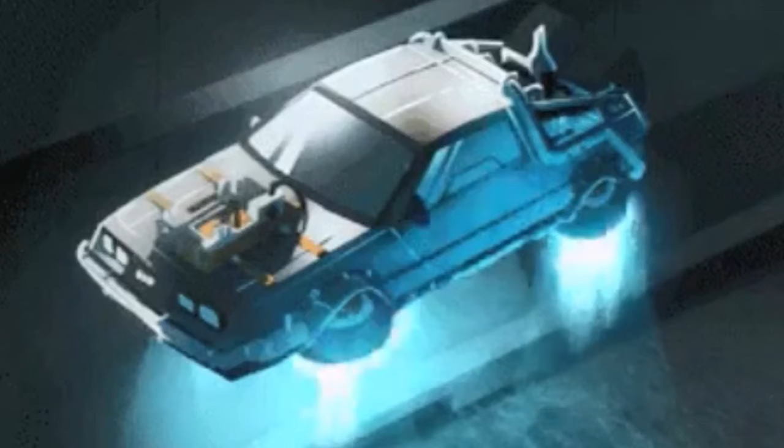Since 2018, Elon Musk has been hinting that the newest Tesla Roadster will use rocket thrusters to launch the car at previously unheard of speeds for production vehicles. Then, in February 2021, Elon appeared again on Joe Rogan's podcast and gave more details on the planned rocket car hybrid, saying it may even be able to hover 1 or 2 meters above the ground.

Now, is this just Elon Musk being the eccentric billionaire we have come to know and love, or is a flying rocket-powered roadster actually possible? There seems to be a lot of differing views around this, so let's do some rocket science and find out if this is physically possible.

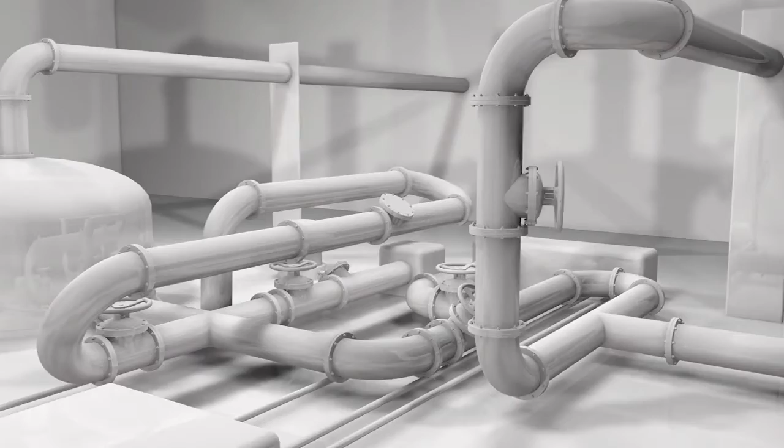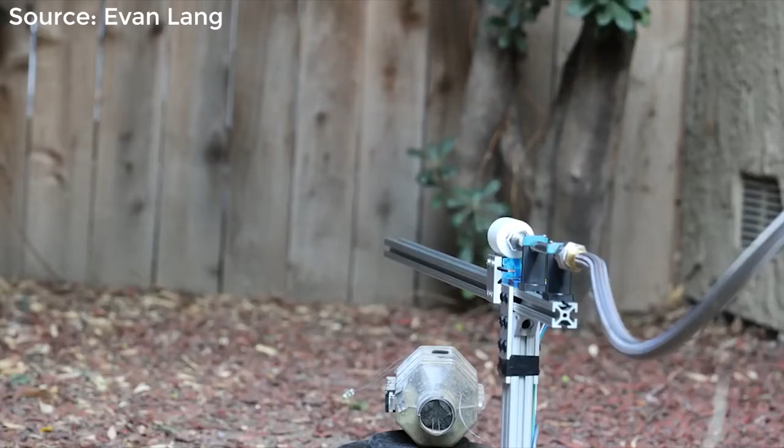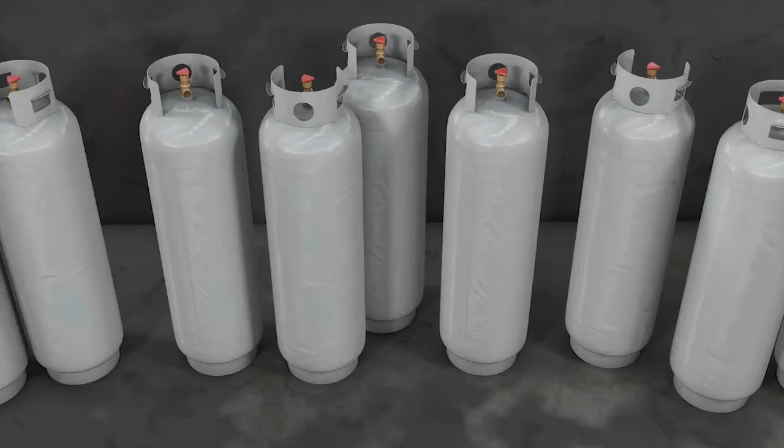Before looking at these, it is good to see what a cold gas thruster actually is, as that is the type of rocket Elon Musk says the Roadster will use. A cold gas thruster is a type of rocket engine that uses the expansion of a pressurized gas to generate thrust. This gas could be many things, such as nitrogen, helium, or even normal air, which is a mixture of lots of them. Elon Musk has said that the Roadster will use air from onboard compressors.

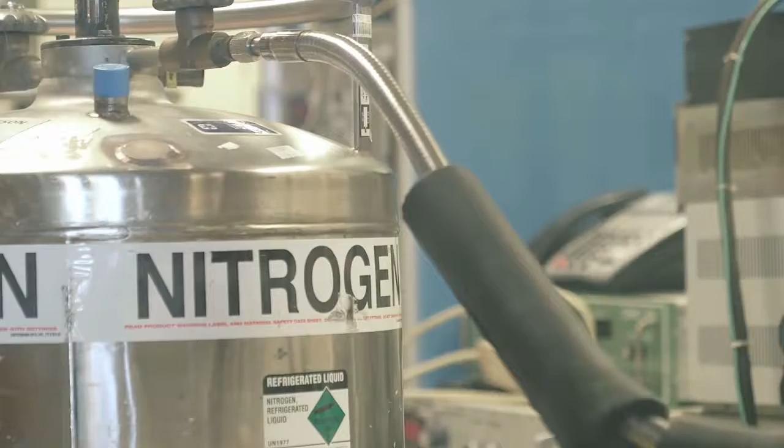However, as we will see later, this is probably not the most practical option, so we will instead assume that we are using compressed nitrogen gas. The compressed gas is in a pressurized tank, and as it is released through a valve, it expands and produces thrust. This makes cold gas thrusters much simpler, cleaner, but also less powerful than other rocket types.

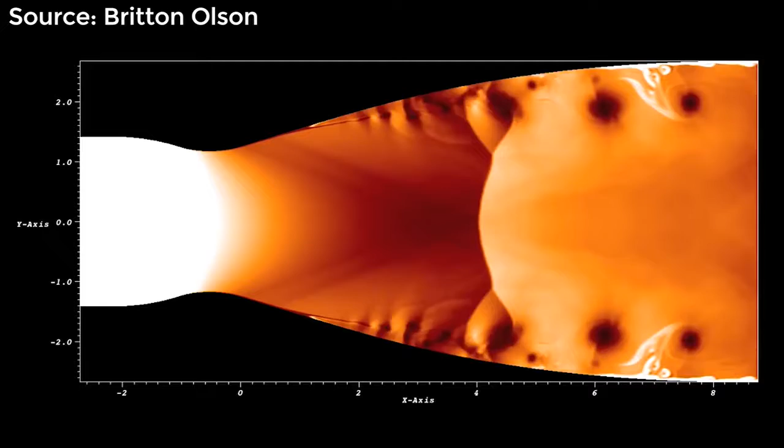Because looking at the nozzle design is beyond the scope of this video, we'll assume we have an ideal nozzle which perfectly expands the gas. This means that the pressure of the gas here, at the exit of the nozzle, is the same as the pressure around it in the atmosphere. This makes the whole system much easier to understand without sacrificing too much accuracy.

So from what Elon has said, we know the rocket should produce 3 tons of thrust on Earth, which is equal to 30,000 newtons of force, which incidentally would be enough thrust to lift the whole car off the ground, as it is expected to weigh around 2 tons.

And to allow the Roadster to hop off the ground or accelerate to over 100 miles an hour, we'll probably need this for, let's say, 5 seconds. With this, we can start to size the rocket thrusters and see if this is actually possible.

You may have seen videos about rockets with people talking about specific impulse, which is a good measure for seeing how much thrust certain types of rocket propellant can give you per kilogram. So a high specific impulse means you get a lot of thrust per kilogram of fuel.

However, in this video we are going to look at how fast the gas comes out of the rocket, known as its exit velocity. Because we are assuming we have a perfect nozzle, these values are easily related. Personally, I also find exit velocity much more intuitive and easier to understand than specific impulse. To find out how much thrust our rockets can give, we'll use a variation of the classic force equals mass times acceleration, or Newton's second law.

Instead, we'll say the thrust force is equal to how much gas is being shot out of the rocket, known as the mass flow rate, times how fast it is going. So we know the force needed, which is 30,000 newtons, but how do we know how much gas is coming out and how fast it is going?

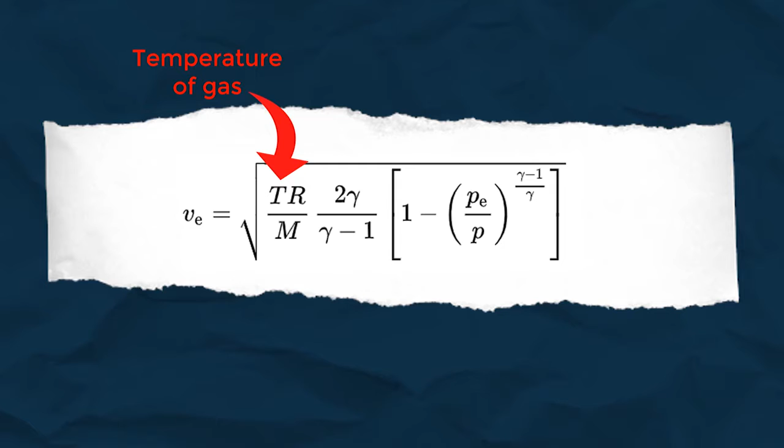To answer this, we'll first work out the speed of the gas. This uses a pretty horrible looking equation, but it's not important to understand fully, so don't worry if you don't, and stick with me. The key thing to know is that with this equation, you can work out the speed of the gas coming out of the rocket if we know its temperature, pressure, and some information about our chosen gas, which is nitrogen.

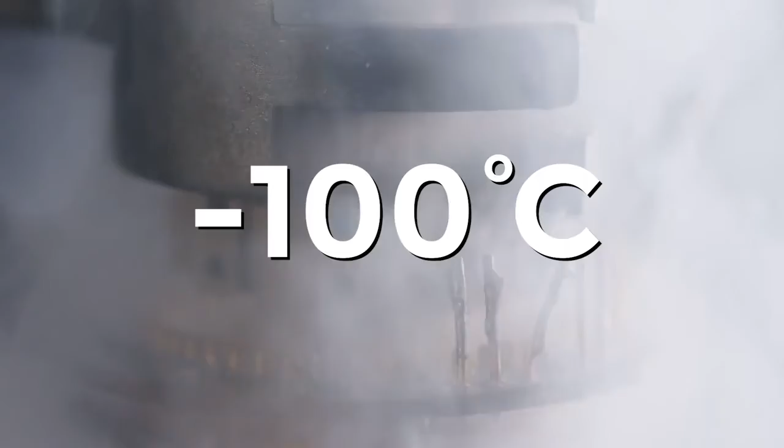Because the gas absorbs a lot of heat from the pressurized tank as it expands out, the cold gas thruster can get very cold. So for this video, we'll use minus 100 degrees Celsius, or minus 148 degrees Fahrenheit.

And for the tank pressure, we'll vary it to see how this affects the speed of the gas. This graph shows the results, and it is clear that if we keep the tank pressure above a few hundred psi, we should be able to keep the gas going around 500 meters per second, or 1100 miles per hour, at all times. It will be quicker to start with before the thruster gets cold, but this gives a good overall estimate.

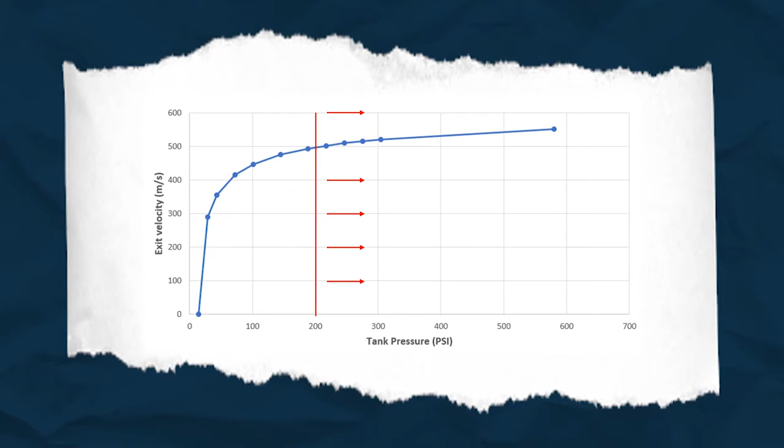So now back to our original formula. We know we need 30,000 newtons of thrust from a jet of gas going 500 meters per second. From this, we can work out that we need 60 kilograms per second of nitrogen gas. So for 5 seconds of thrust, we'll need a total of 300 kilograms of nitrogen.

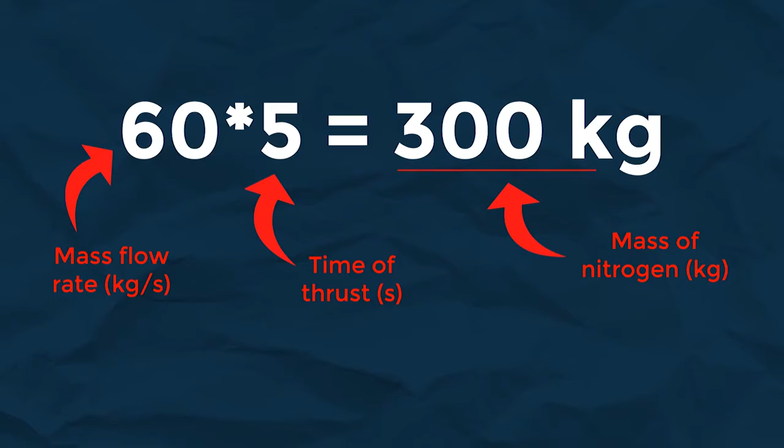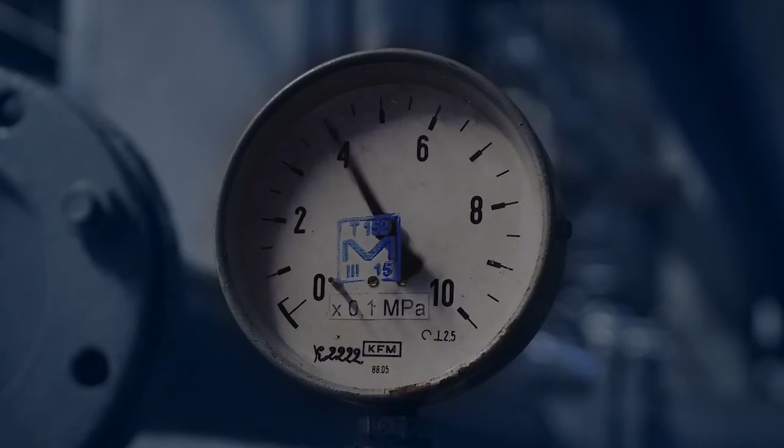Well, that sounds like a lot of gas. And it is. So is this even possible? The way this would be stored is in composite overwrapped pressure vessels. These can hold very high pressure gas, up to around 700 bar or 10,000 psi, which is the value Elon Musk said the gas will be stored at. For reference, this is also the pressure that hydrogen is kept at in the Toyota Mirai.

With this information, we can see how many gas tanks we will need. But before we do that, there's one more thing we need to look at. The gas released from the pressure tanks is controlled by valves, and these need to be able to allow enough gas to go through them at all possible operating pressures.

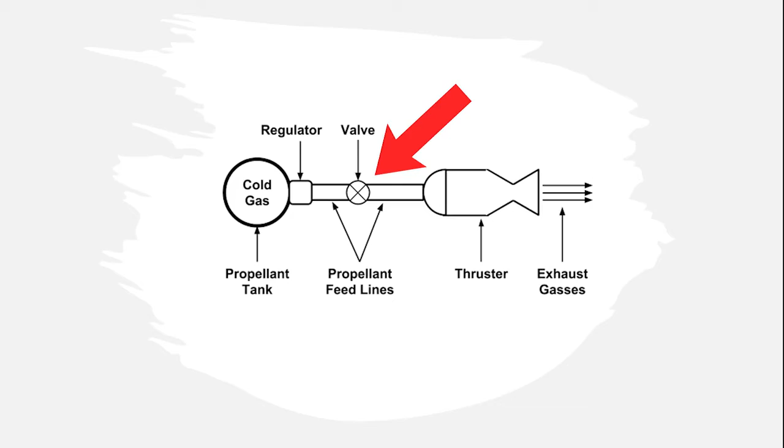To keep the same amount of gas flowing the whole time, the valves need to open wider as the pressure drops. Think of this like lots of people trying to fit through a door. If the door was bigger, people behind wouldn't have to push so hard or apply as much pressure to get the same amount of people through the door.

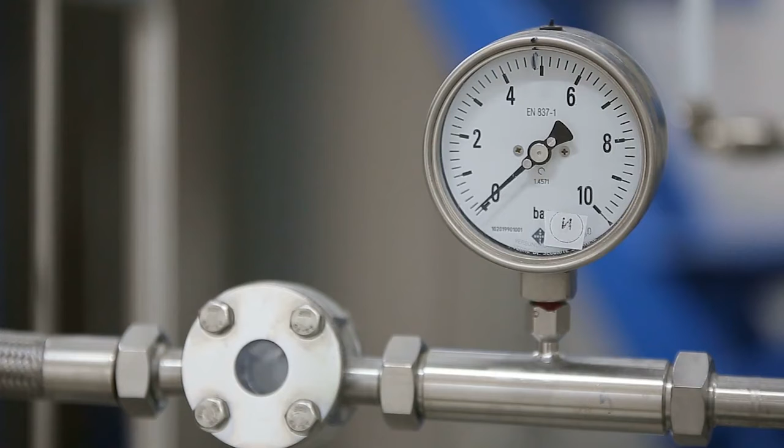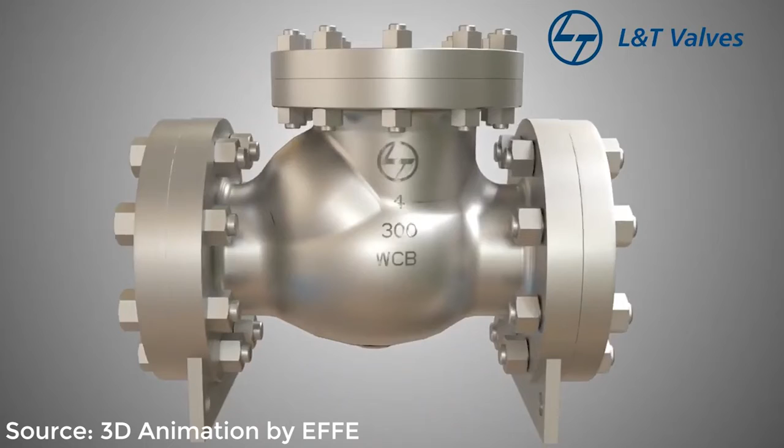So why is this important? Well, as the pressure in the gas cylinders gets very low, the valve would have to open extremely wide to let the needed amount of nitrogen through. For valves, a value called the valve coefficient, or CV, is used to say how much gas or liquid will pass through them under a certain situation. As the pressure of the nitrogen tank decreases, these valves will have to operate at a higher CV value to make sure enough gas can go through it.

To show this, I've used an equation that works out the valve coefficient depending on the required gas flow rate, its density compared to air, and the tank pressure. Though it should be noted, for the flow rate of the gas, I have divided it by 4, as we will assume 4 small tanks are going to be used. Like with exit velocity, I have plotted this for different tank pressures.

We can see that the valve coefficient gets pretty big when the pressure in the tank goes below a couple thousand psi, unlike the exhaust velocity that only started reducing after a few hundred psi.

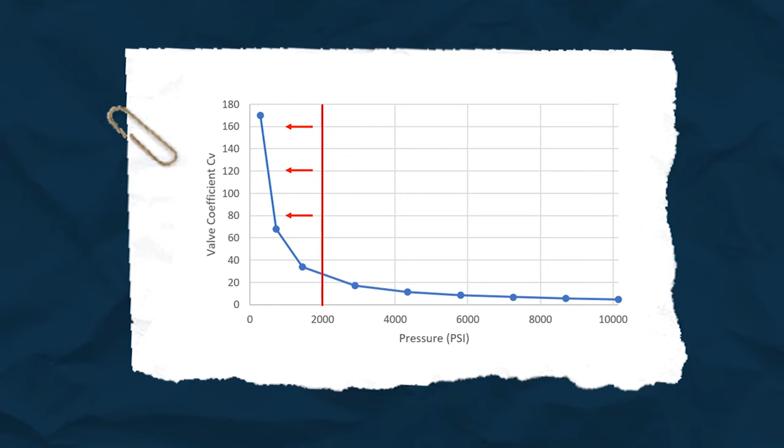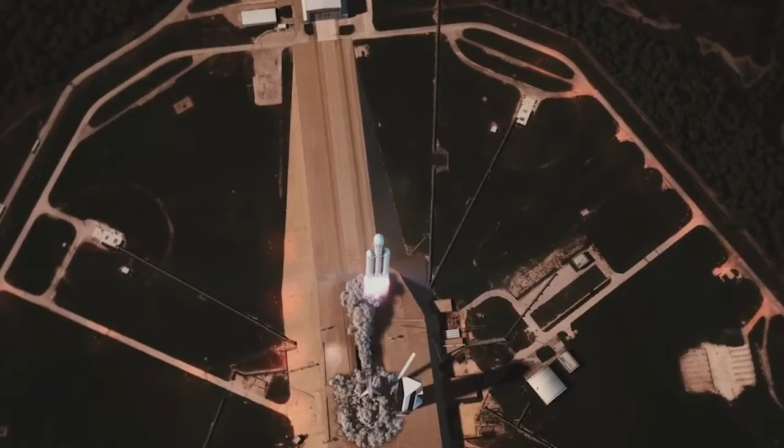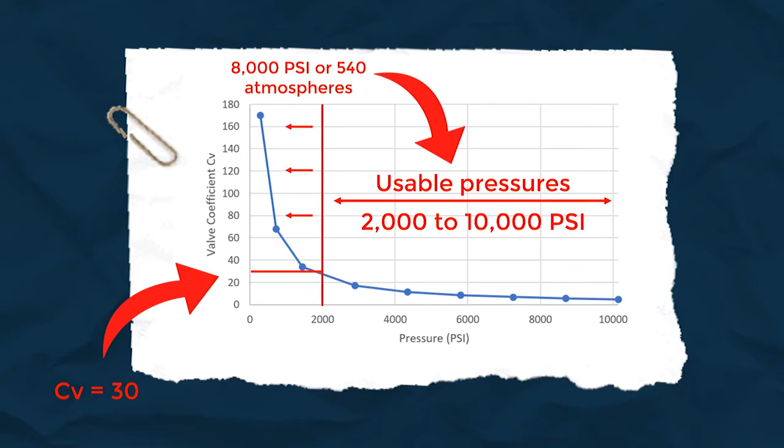If we say Tesla can source some very high performance valve tech from their convenient friend SpaceX, we can roughly estimate the valves would be able to operate at 10,000 psi with a valve coefficient of 30. This would mean that although we are using 10,000 psi tanks, we wouldn't be able to drop the pressure below around 2,000 psi. Otherwise the valve would be too small to let enough gas through to give us the thrust we need. Meaning we have 8,000 psi, or about 540 atmospheres of pressure, to work with.

So why do we care about this? Well, this is how we now work out the size of the high pressure tanks. We know we have 540 atmospheres of usable pressure, and that we have to store 300 kilograms of nitrogen, which is equal to 240,000 litres. Because this 240,000 litres will be pressurised 540 times, it means it will only take up 450 litres of space, which is how big the nitrogen tanks will have to be.

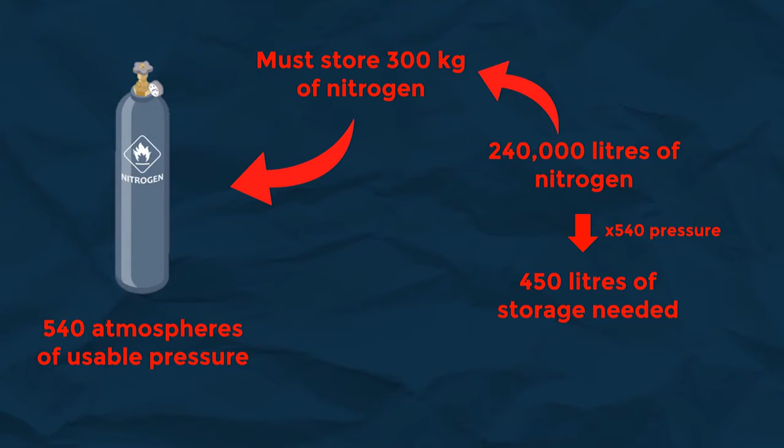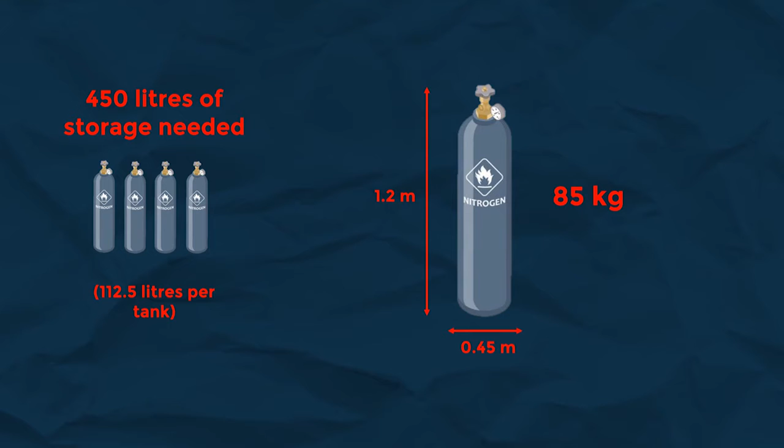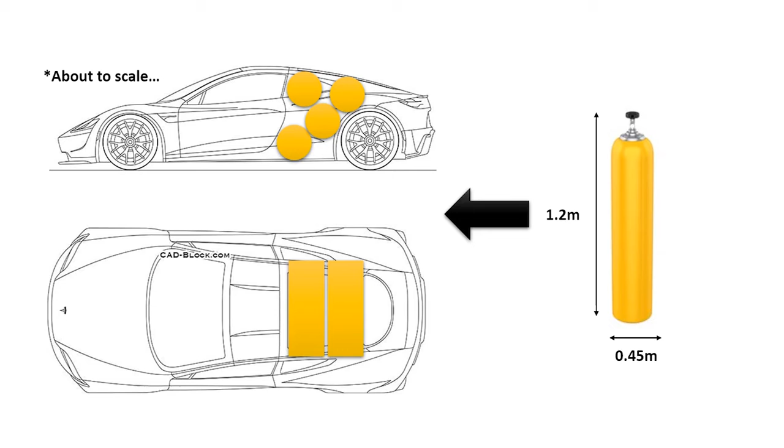By looking at a company called Steelhead Composites, a 112.5 litre tank could weigh around 85 kilograms and have the dimensions of 1.2 meters long and 0.45 meters diameter. By looking at this very rough picture, it seems like it should be possible, with some innovative thinking, to fit in all the required gas tanks into a Tesla Roadster that has no back seats. Though I expect Tesla engineers could do a much better job at this than I have.

So from these rough calculations, I think it shows that the idea of a rocket-propelled car that can even hop off the floor and fly for a second or two, as crazy and impractical as it seems, should be physically possible. I've seen a lot of skepticism about this car, so I thought this basic analysis would be interesting to put into the mix. This is by no means conclusive, but it makes me very interested to see what Tesla does. My main concern for this idea is the refueling.

Elon said that the car would compress air from the atmosphere and use it to refill the tanks on board. But as pointed out in a video by Thunderf00t, this would require a multi-stage compressor and would be very slow and too heavy to fit into a vehicle. Therefore, I imagine an external refill system would be required, much like those for hydrogen fuel cell cars.

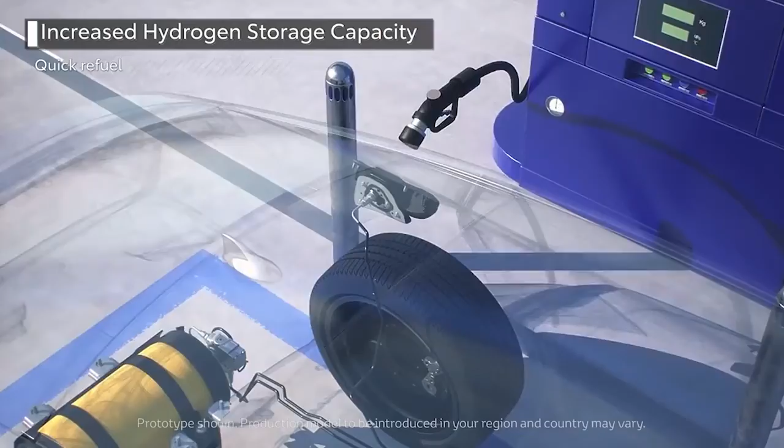Also, as previously said, the gas could not be air. This is because the moisture in it would freeze due to the cold operating temperatures of the thruster. This moisture could be removed, but it would add further size and complexity to the system.

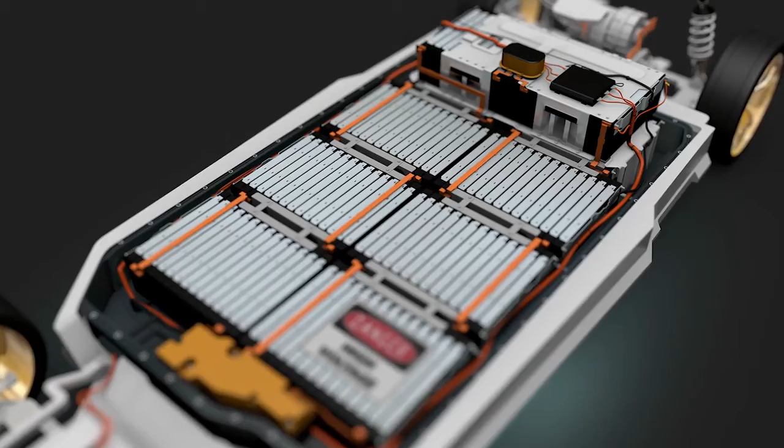In total, the tanks and gas would weigh around 650 kilograms when full, or 350 kilograms when empty. This is a lot of extra weight, so maybe some of the batteries may be removed and others rearranged to improve the weight distribution in the car.

Overall, it sounds like a fun project to work on that could, from my calculations, be technically possible. But we'll have to wait and see what happens.